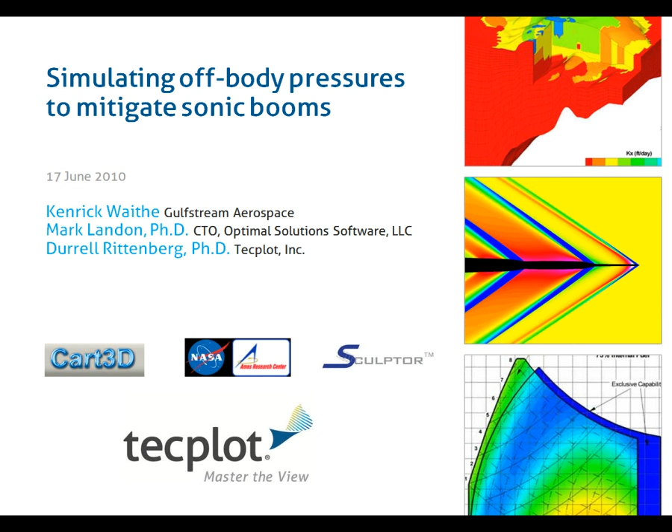With that, let's go ahead and set the agenda here. Well, first let me introduce our speakers. We're joined by Kenrick Waithe. Kenrick has been working in the aerospace industry for a little over 12 years and has worked for Skunk Works, NASA Langley, and most recently with Gulfstream. His primary area of interest recently has been identifying new methods for sonic boom prediction and design, design and analysis of new supersonic technology concepts, as well as being the focal point for staying abreast of new CFD tools and development in the industry, by industry and government. And we're very pleased to have Kenrick with us.

In addition, we're joined by Mark Landon. Mark is the CTO and co-founder of Optimal Solutions, and their primary tool is Sculptor. His career spans back a few years, and he's worked with Rockwell, over with Rocketdyne as well. He worked with the Department of Defense, and has over 22 years experience in engineering and design. He did his graduate work at Brigham Young University, and he'll be telling us a little bit about Sculptor and how Sculptor can be used for optimization of geometries.

My name is Durrell Rittenberg. I'm the Director of Customer Development here at Tecplot. I've been with the company now 9 years, and my background is computational physics and chemistry. And over the last 9 years, I've been kind of the key technical resource here at Tecplot, and one of the many people who get involved in webinars like this.

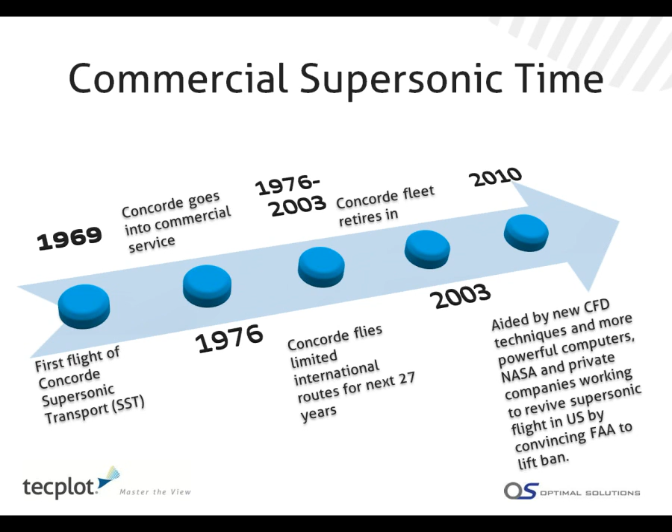So in 2010, there is a renewed interest in figuring out ways to mitigate some of the sonic noise. And many people, including NASA and some private companies, including Gulfstream, have been working on strategies for that sonic boom mitigation. And with that, I'd like to introduce Kenrick and turn it over to him.

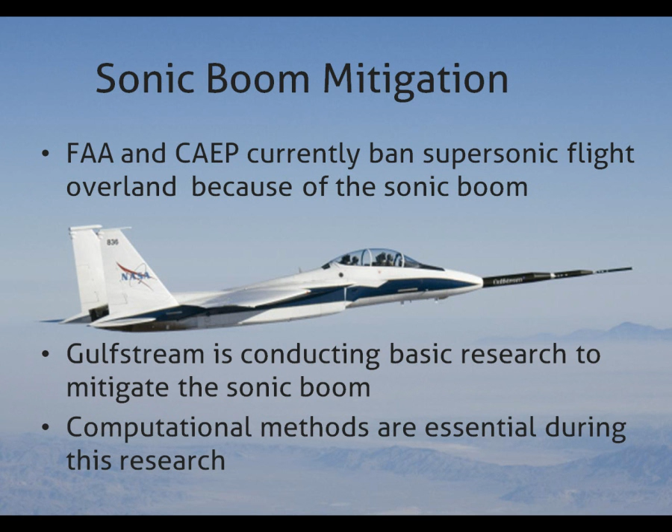Next slide. The next slide is basically a poster that has been displayed with our SAS demonstrator. A lot of people have seen this already. And the reason I'm showing this is just to show you, as I mentioned on the slide before, that computational methods are very important in this research.

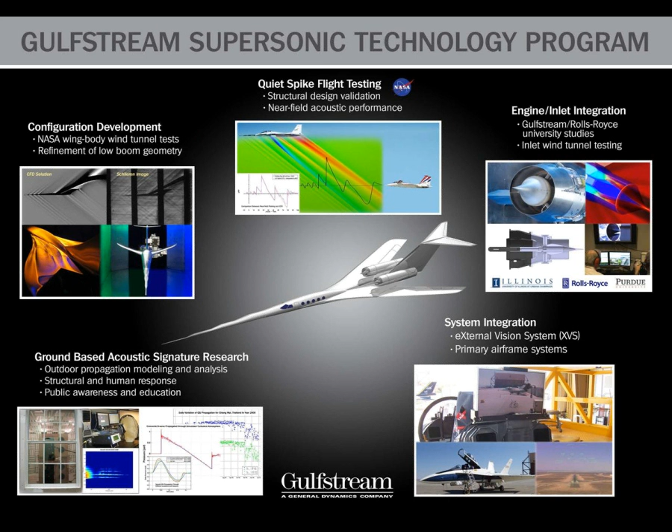If you look at the top three pictures, you'll see CFD, or computational fluid dynamics, images in all three of those. And that just shows you how heavily we're relying on CFD and those types of methods in this type of research. You can see from the quiet spike to engine simulations to before we go into a wind tunnel, we always use CFD pretty heavily. If you go to the next slide.

This slide is taken from a presentation I did at Reno a couple of years ago. And basically, when I first got to the company, we were looking at different methods to first predict the sonic boom. And so we looked at a hybrid method, and there's a paper, AIAA 2008-0129, and there were some other papers on this also. I think some people at Cessna did.

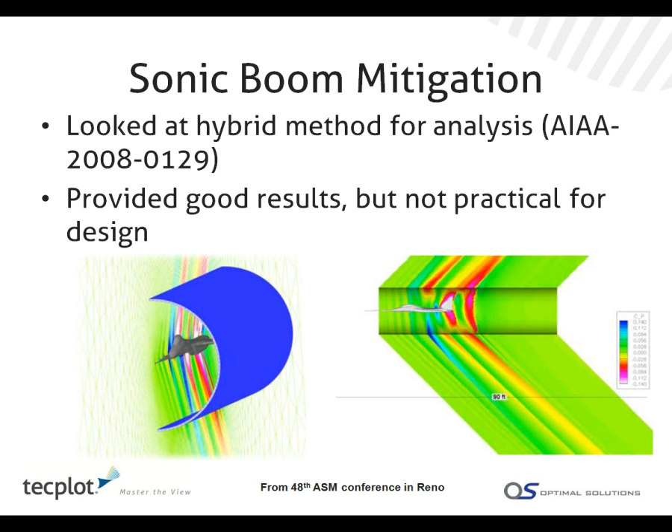What we came away with from that was that the hybrid method provided good results, but it was sort of cumbersome, and how is that going to be practical for design? And the images that you see there are just some simulations from the F-15 with the quiet spike. Since we had experimental data, it was a good way to validate the method. Next slide, please.

So what you really need for a design, if you're trying to design for low boom, is really, I think, accuracy. So you need to have tools that can accurately predict the boom, but you also need speed. So one of the things we always try to do at Gulfstream is identify fast and accurate CFD solvers.

The picture on your left is from the NASA FAP in October 2008, where they had a boom prediction workshop. They had basically USM3D, FUN3D, Cart3D, and Airplane, a lot of the NASA codes. And quickly from that, we saw that USM3D was a pretty accurate code with some augmentation to it, but the two most accurate codes that we found for sonic boom happen to be Cart3D with the adjoint and FUN3D with the adjoint.

They always seem to nail the signatures without a priori knowing where the expansions and compressions were going to be. So it's really great, especially if you're thinking about designing. With USM, you have to worry about where the compressions and expansions were and make sure your grid's just right. With those two codes, you didn't have to worry about that. So that was really nice.

And like I said, if you're thinking about design, your compressions and expansions are going to change. So that would mean your grid would have to change. So with the adjoint, you had the capability of it adapting and changing as your design changes. The next thing we identified is that generating grids was really time-consuming. And if you could go through a design process without having to regenerate a grid, that would really add speed.

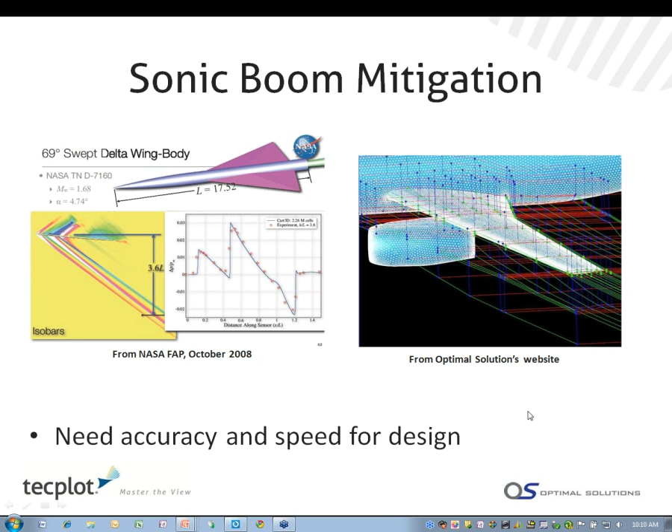And I think that should lead to Mark's discussion on an example of Sculptor and Cart3D and Tecplot all together.

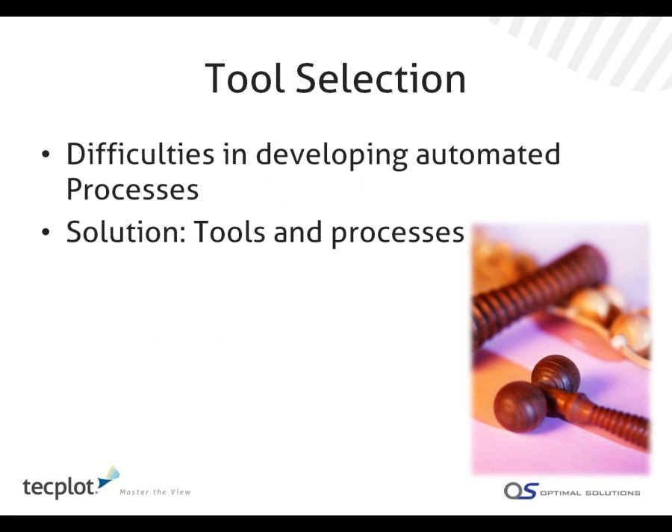Thank you, Kenrick. Yeah, just to point out again, as Kenrick was talking about the tools, at this point I'm going to turn it over to Mark, and Mark's going to talk about how he used Sculptor, Cart3D, and Tecplot to illustrate this kind of process was possible. So let me go ahead and turn it over to Mark. Mark. Thank you, everyone.

The shape optimization process does need to be automated, not only the shape deformation and the change in geometry with the parameters that the user needs to define. He needs to be able to define his own parameters and be able to change the shape of the object automatically in an optimization environment. So this requires automation of the data handling, automation of the analysis calls to call the CFD or other analysis tools, and put this into a loop that can basically work automatically, but still have the option to guide it based on the user preferences.

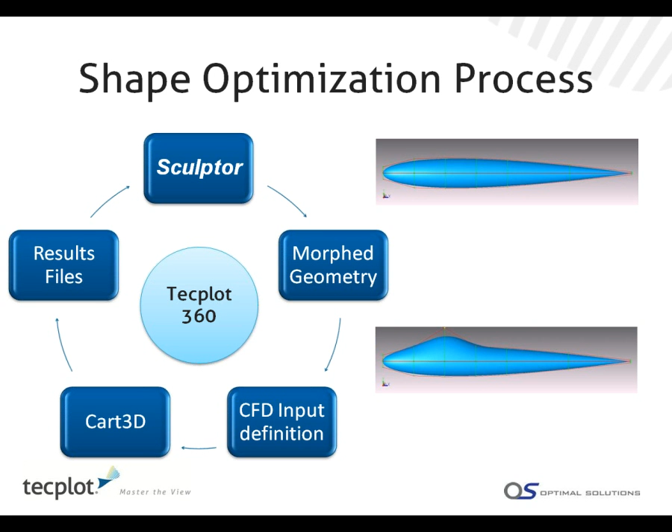In this example, we see that Sculptor does the deforming or the morphing of the geometry based on user-defined parameters. It sends that new geometry to the CFD call, in this case Cart3D, and it takes the results, where in this case Tecplot is reducing the data, post-processing the data, and helping provide a few parameters, dependent parameters called the objective function or the merit function, so that the optimizer will know what to improve. Next.

This is more of a detailed image of how Sculptor in an optimization loop is working with Cart3D and Tecplot. You come in with your initial geometry up on the upper left green oval. Then you run Sculptor. Here you provide your shape change parameters. We create what we call an arbitrary shape deformation volume, or an ASD volume, that those design variables then can change the shape and provides a new geometry file for the CFD run.

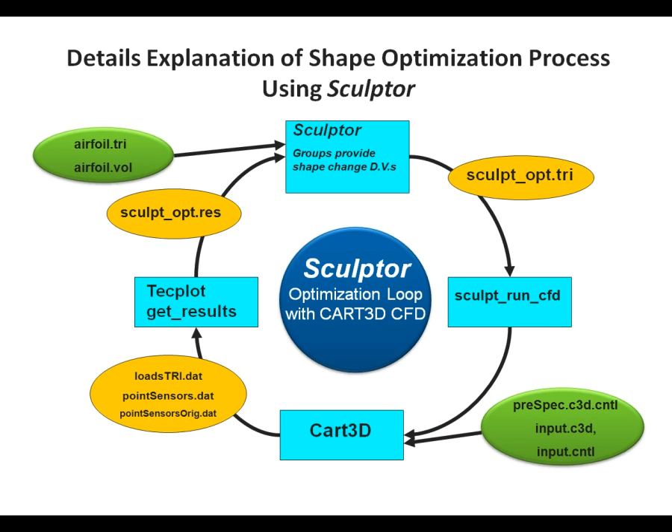And then that's called to run Cart3D in this case, and the same information that defines all of their material properties, boundary conditions, and so forth come in, and in our case we had it output some data, and Tecplot was used to get the results of some off-body pressure points or sensors, and we compare those to some target sensors, and we're going to talk about this with an example here presently. Tecplot then produces a file of results back to the optimizer, and this optimization process is automated. Next slide.

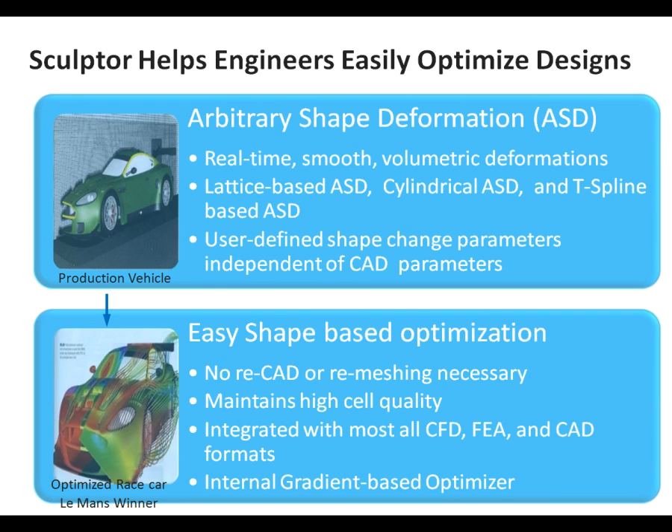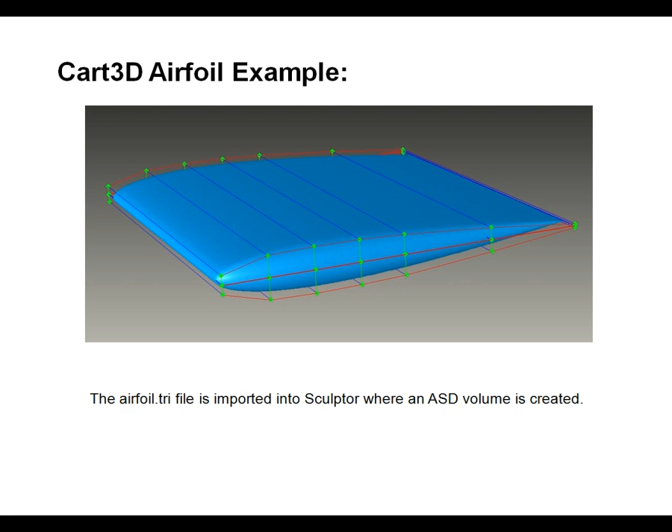So here's the airfoil. We just took a test case right out of the Cart3D manual, and it's a 3D model, but it's simulating a 2D airfoil. And we have a cut plane that goes right through the center of this to give us the feedback for the pressures that we need to perform this optimization. So this was airfoil.tri. We imported it into Sculptor, and we create this ASD volume. It took maybe 10 minutes to create this ASD volume, as well as to create the user-defined design variables, which we call groups. Next slide.

These groups are defined by simply combining control points together. In this case, we took the near side and the far side corresponding control points and grouped them together to move as one value. Control point 23 and 51 were grouped together into one variable, allowed to move in the y direction, so they can move up and down, and we get a corresponding deformation.

10 total variables were defined, so we have 5 across the top and 5 across the bottom. We can effectively change this airfoil and deform it arbitrarily into new shapes that will give us the design freedom necessary to find an optimal shape.

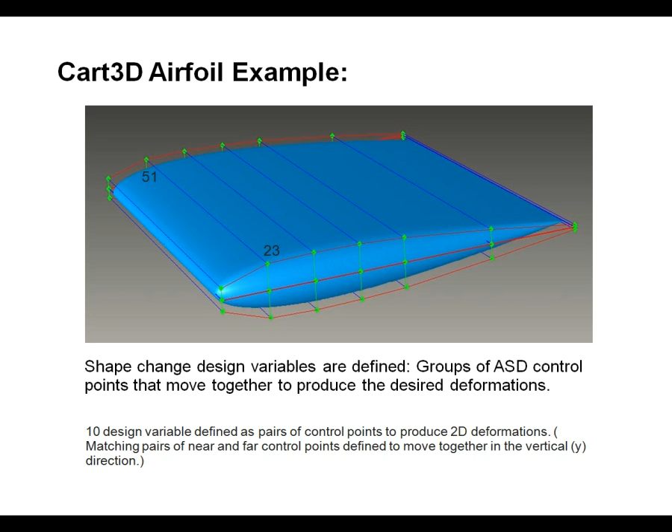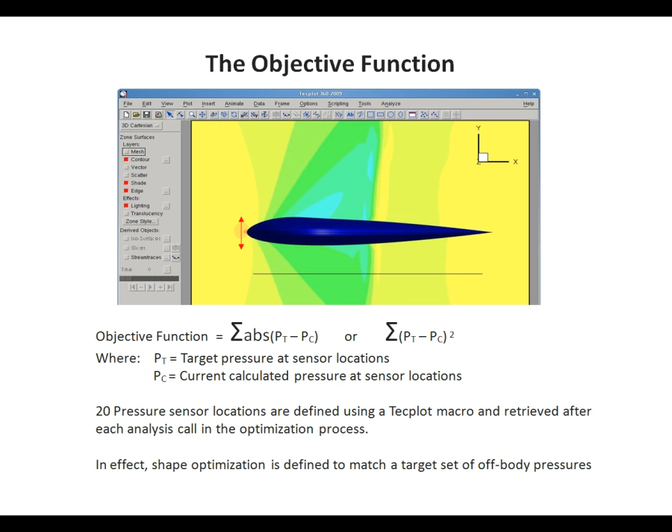Now, these off-body pressures could be defined any way we want, and in this case, on the next slide, we simply took each one of these variables and moved them up 0.02 meters, which gave us a shape. We took that pressure along those sensors and summed them up, and that became the target pressure sensors.

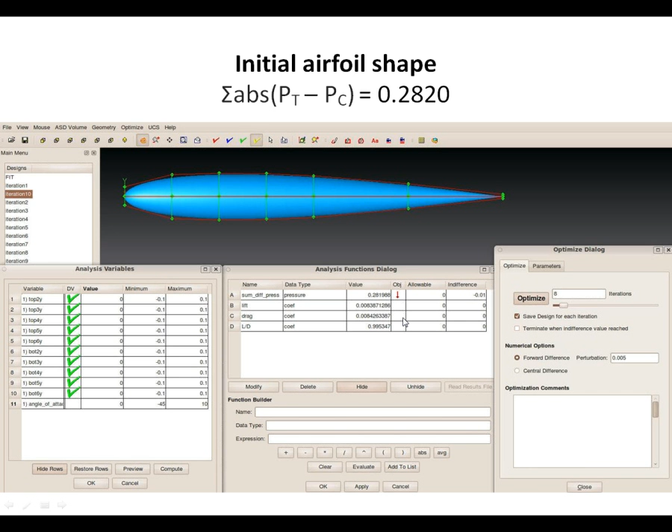In the middle here we have the analysis functions, and here we have the sum of the difference in pressures as the objective function. We're going to minimize it, and then the optimization algorithm control. Next slide, please.

The different design variables are shown here just for illustration. We have the undeformed shape, and this is a deformation with the first variable moved up some large amount—you see the very smooth deformation of that particular variable. The next one has a different region of shape control, and the third one, and the fourth one, and the fifth one, and so on.

Similarly, the bottom 5 that we're not showing here also have the same type of shape change control. Any control point has maximum control near its location, but that control attenuates to 0 up to 2 control points away from it in any direction. So we have very accurate local control of the shape change, simply based on where we place the control points, how we group them together, and how close they are in relationship to the adjacent control points.

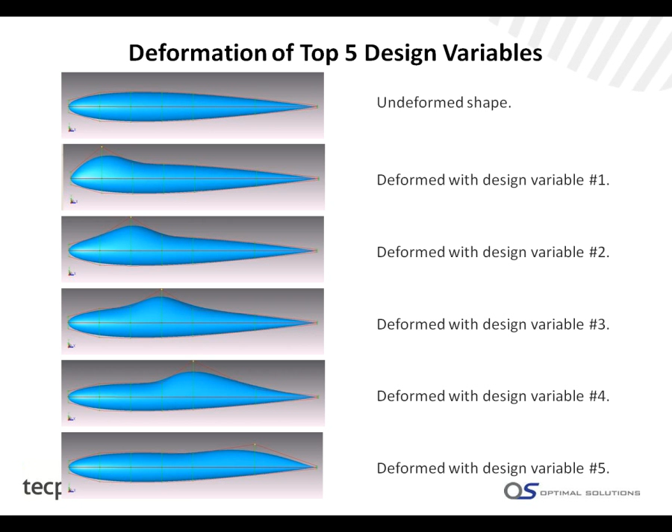This allows us to have great control over very fine and accurate deformation, without wiggles or deformation far away from a certain control point. This has been proven over and over to be very successful in giving the design degrees of freedom you need to get to an optimal shape. Next, please.

Here's the target shape, created by moving all of the control points up 0.02 meters, compared with the undeformed shape, and you see the difference. There's a significant effect on the pressure fields, and the line under the wing—that's those 20 pressure points.

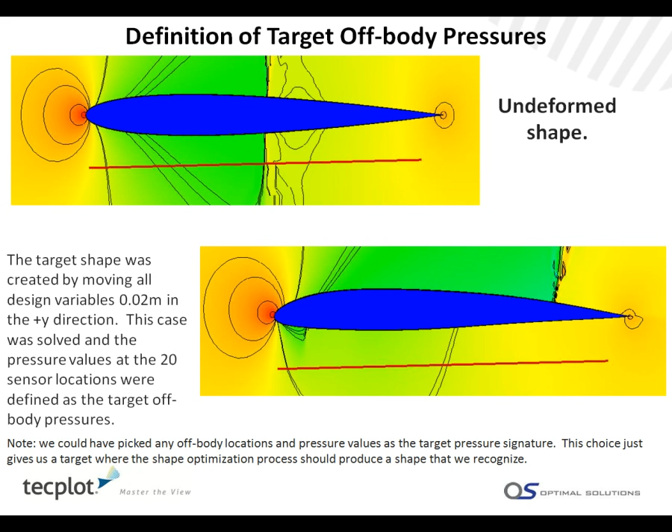This target shape was created by moving all these design variables, and we took this as the target off-body pressure. We could have picked any off-body locations or pressure values to be the target, but this was just a choice so that when we did the optimization, we would recognize that we were at the optimum for this case.

So here's the progression. Since this was a gradient-based optimization, it needed to produce a gradient call for each optimization iteration. And it started here, and it did a gradient call, and it marched in a line search.

The very first iteration found great improvement in the design objective. It went from 0.282 to 0.0687, a significant improvement, but not close enough based on the tolerance we gave the optimizer.

So it repeats this step two more times for iteration number 2 and iteration number 3. We chose to stop after 3 iterations because we're at 0.007, which is very close. But moreover, if you look at the shape we ended up with after optimization, it's practically the same as the target shape, so we know we ended up there.

Now, this is of course a gradient-based optimizer and has the limitation that it finds the nearest local optimum. We were lucky that it found this optimum, and there probably weren't a lot of different optimums to find. But if that becomes a problem, there are other optimizers out there that work very well with Sculptor, Tecplot, Cart3D, and other CFD tools that have more global optimization search capabilities.

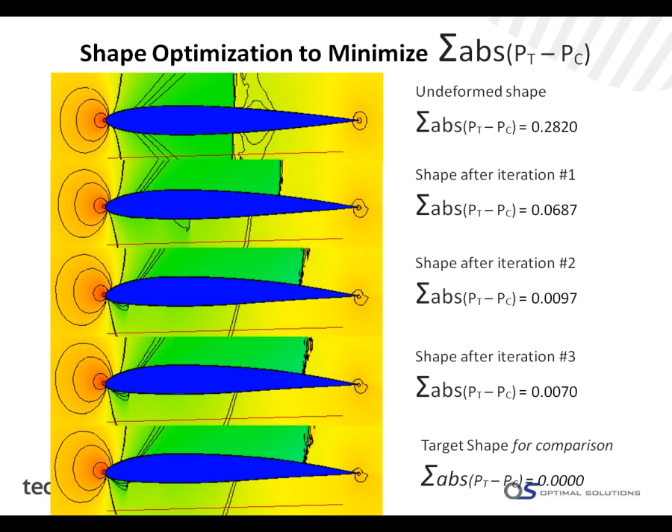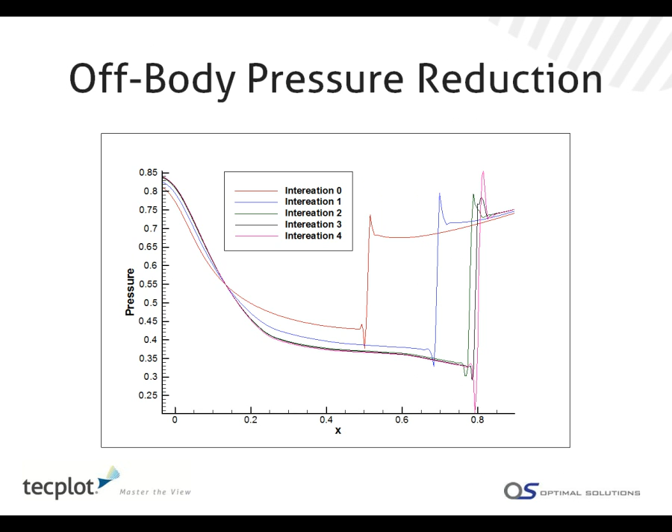So I'll turn the time back over to Durrell, and he's going to show some animation of the... it looks like, I'm not sure what that's doing, but okay, you should see the off-body pressures. Let me take a second and show you what that looks like and see if this actually comes up for you.

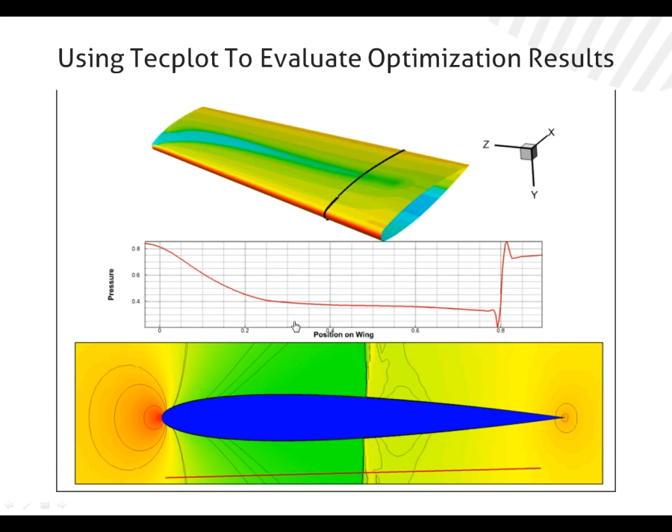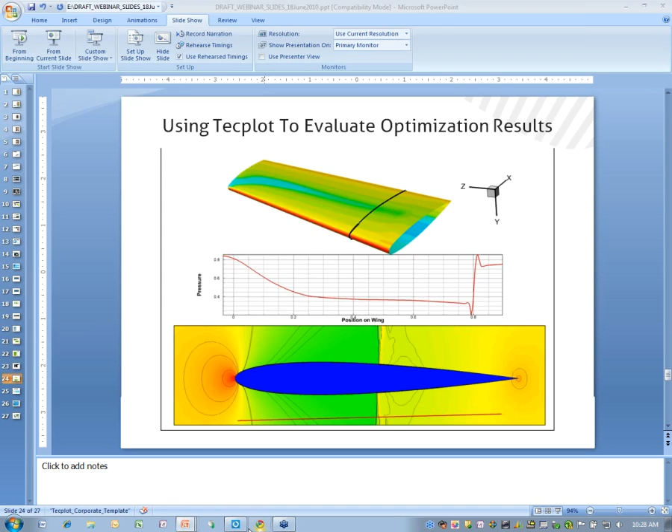What I've done is basically bring in those results so we can look at the individual iterations, and created an animation which effectively walks through each one. If the animation doesn't play here, I'll just open up the application. It looks like it's perhaps having Microsoft issues, so I'll go into the app here, and I'll wait until you can see that on screen.

Okay, so this is what I was going to show you, just a simple animation. We've taken the results from the optimization study and brought them into Tecplot, and used, in effect, time—but it's not really time in this case. We're actually looking at each iteration, and we're looking at that off-body pressure.

As we walk through each iteration, you can see that, as Mark pointed out, after one iteration we saw a significant decrease in the off-body pressure, and then in the second iteration, and finally the third. If we compare this third iteration with the design target, you can see there's almost no difference between the two. So within 3 iterations, we had a pretty optimized airfoil.

Of course, we could animate this—if you had a study that perhaps had 100 iterations or more, there's a good chance you could watch that optimization progress, and that could be very helpful because you may actually see some local minima where it's worth stopping, going back to that point in the optimization, and perhaps making some changes.

So Tecplot, as you know, fits into the process as it allows you to both redo the batch extraction and give the results back into Sculptor, which is used for that absolute pressure difference. In addition, you can go back to any one of these and do additional analysis.

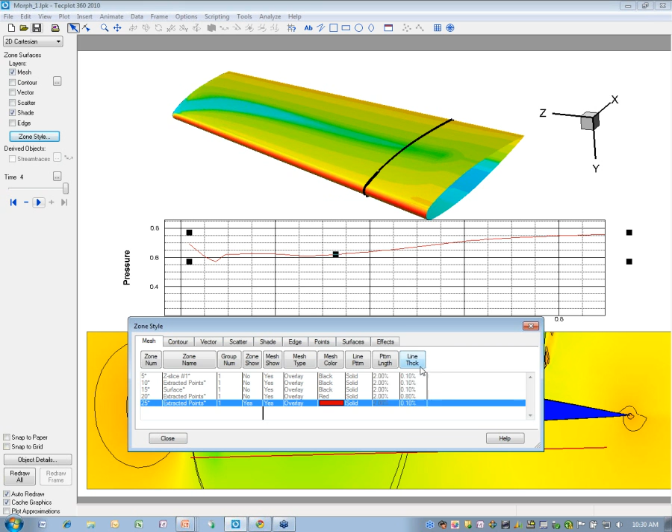So basically we have a new set, and if we go back up here, I can just change now—this is that second line. I'm just going to make the line a little easier to see by changing the color, but don't worry about that too much. Okay, so that's the next line we just moved, and you can see, if we play through, that optimization. So we just provide a nice framework for doing that analysis.

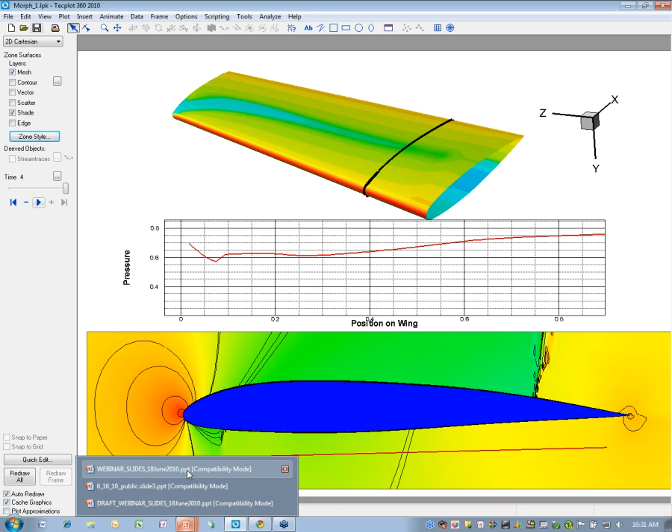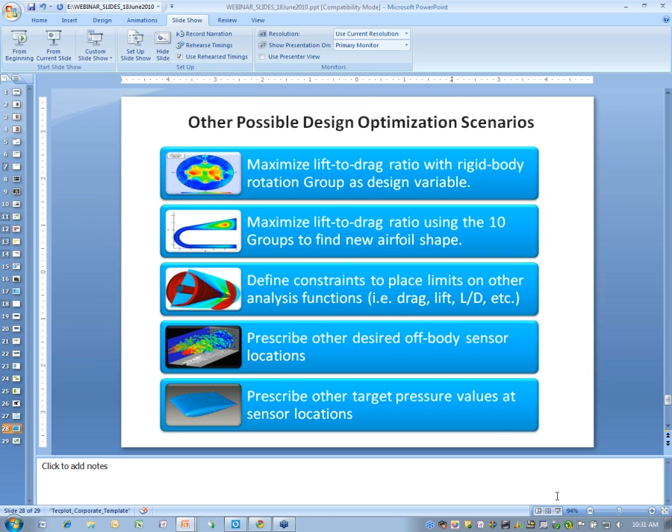And with that, I'm going to go back into PowerPoint. We have just a few more slides, and then we're going to jump into some Q&A. I'm going to turn it back over to Mark, and he's going to discuss some other possible design optimization scenarios. We'll spend perhaps a minute or so on that, and then I'd like to open it up to questions. We do have quite a few questions queued up here, and we'll be getting to those in just a minute. Mark?

The other possible design optimization scenarios would be to change the objective function. Since the CFD is also producing other criteria, we could take the lift to drag ratio, or just the lift, or the drag, and provide different searches, so as to maximize the lift to drag ratio with a rigid body.

We could set a group of control points to rotate this airfoil about a hinge line, for example, and find the maximum orientation of the wing. That's a fairly straightforward, single design variable type optimization.

But moreover, we could allow those same 10 variables to move, to change the shape of the airfoil for a maximum lift to drag, or min drag, or max lift, whatever you decide to define as your objective.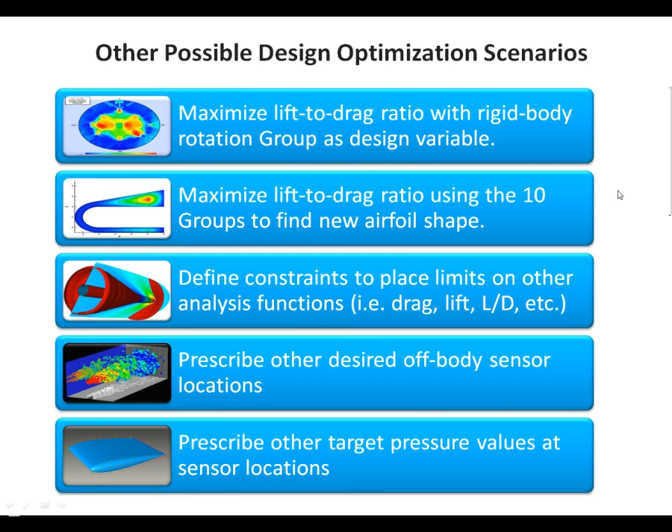This, I believe, is for you, Mark. You mentioned a gradient-based optimizer. I wonder if you used gradient-based optimizers for this example, and if so, how is the sensitivity gradient calculated? Well, yes, the gradient-based optimizer we used here is currently the one and only optimization algorithm inside of Sculptor, and it does a forward difference operation. It just perturbs each design variable a small amount. You have control over that perturbation, and once it goes through, it needs to make a CFD call for every one of those. That's probably the only drawback to gradient-based methods. However, with those gradients, as in this example, it found a very good, robust gradient and got most of the improvement—80 to 85% of the improvement that was to be found was done in the very first line search after that first gradient. So it is a forward difference, and it needs to make an analysis call for every one of those variables.